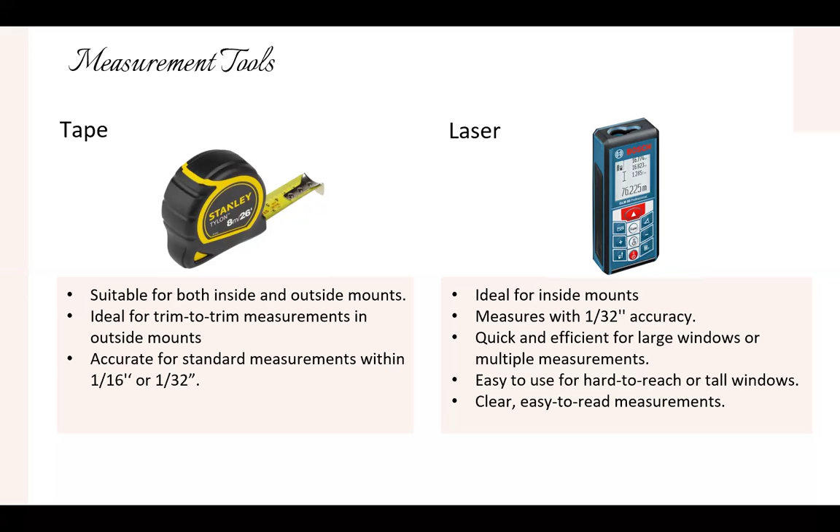For inside mount measurement, whether for open roll or enclosed shades, it's essential to take three width measurements at the top, middle, and bottom, as well as three height measurements on the left, center, and right. The most critical width measurement is the top because this is where the bracket will fit. Windows can be slightly off, with differences of up to half an inch between the top and bottom.

By using the top measurement for bracket to bracket width, you ensure a proper fit for the shade despite any minor inconsistencies in the window frame. For height measurements, use the longest measurement among the left, center, and right measurements. This ensures the shade covers the full height of the window, accounting for any variations in the window frame.

When measuring for outside mounts, the process involves taking three measurements for width, the top, the middle, and the bottom, and three for the height, left, center, and right, similar to inside mounts. However, it's crucial to remember that the measurements you provide and enter on the portal are always bracket to bracket. This ensures that our shades fit perfectly, accounting for the light gap on each side of the fabric. Our shades have specific light gaps, so the width measurement at the top is the most important for aligning the bracket with the window trim.

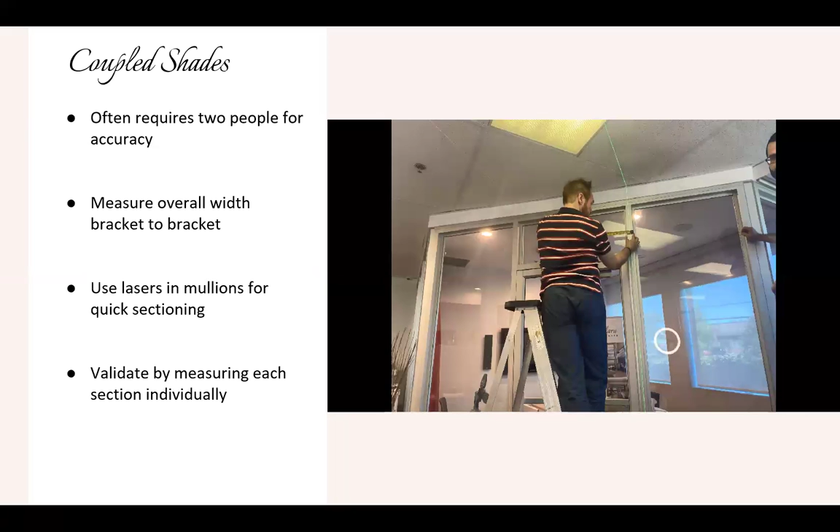For quick and easy installation, we place lasers in the center of each mullion. On the right side, you can see we have a green laser, and on the left side, a red laser. This setup allows us to measure from bracket to laser, laser to laser, and laser to bracket. The video shows the measurement from bracket to bracket first.

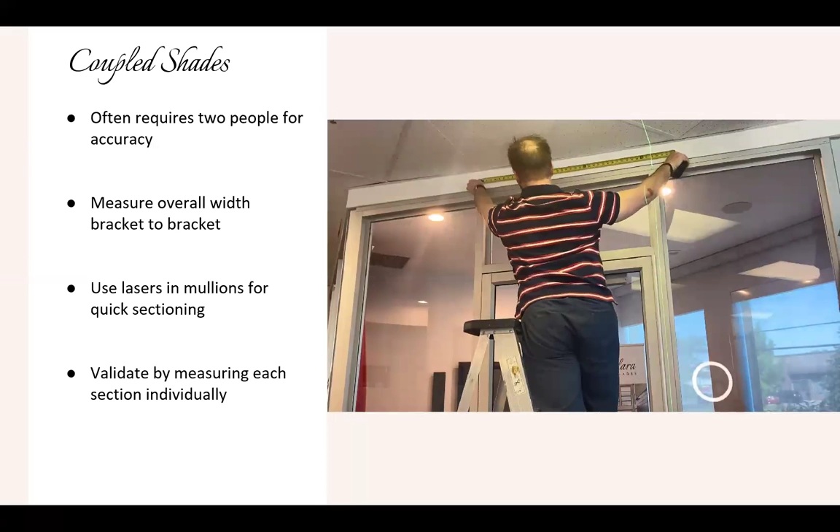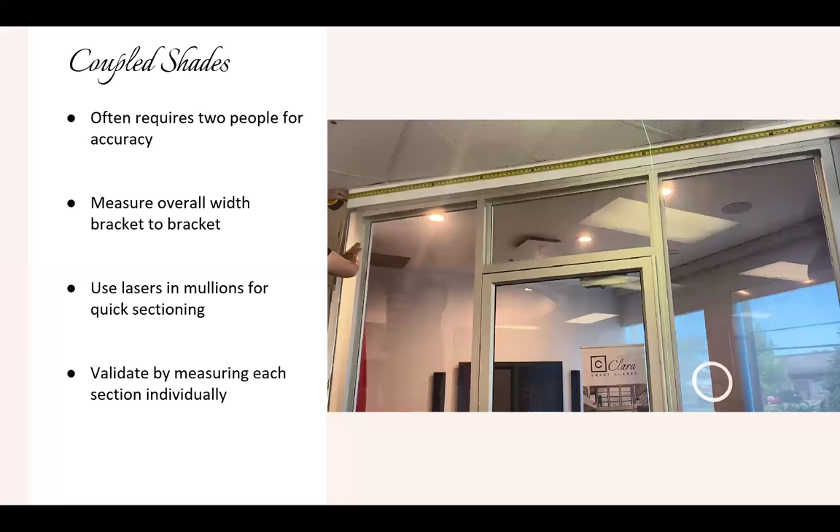Next, it demonstrates measuring the right section from the laser to the right bracket, followed by measuring the center section from laser to laser. While we didn't measure the left section in this example due to deductive reasoning, it's always best to measure each section to ensure accuracy.

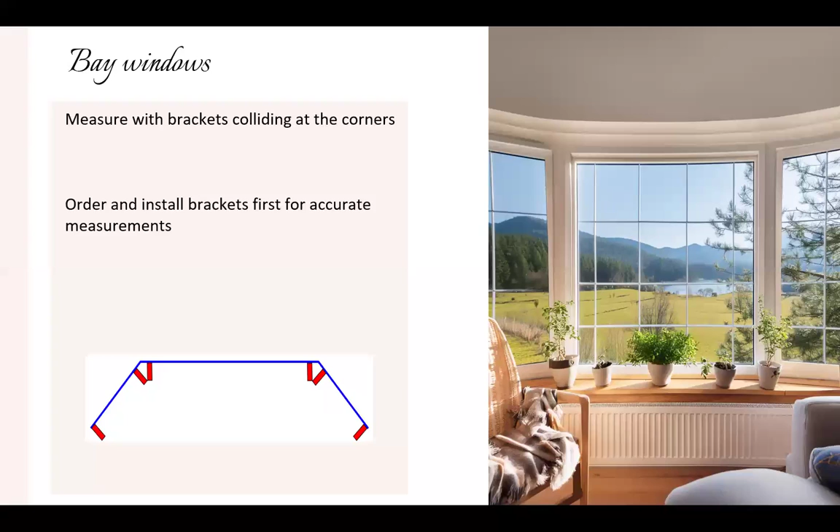While it's possible to calculate these measurements mathematically, it requires precision and experience to avoid errors. Therefore, ordering brackets first is a recommended approach for bay windows. All right. Next, let's explore the different installation procedures.

In the next video, we demonstrate the process of installing an enclosed inside mount regular roll shade. We begin by securing the brackets to the window frame. For this example, the window frame has a depth of over 4 1/8 inches, accommodating our Type 4 bracket, which measures 4 inches by 4 inches, plus the 1/8 of an inch fascia thickness. Since there is no protrusion from the frame, no end caps are required. It's a direct bracket to bracket installation.

Once the brackets are in place, we ensure the shade is leveled using the Allen key provided with each set of brackets. By making minor adjustments, we can align the shade properly to prevent it from telescoping or moving side to side during operation. After confirming the shade is level, the final step is to attach the fascia. It's essential to measure the window frame depth to determine if the brackets will fit without protrusion, ensuring a clean, flush installation.

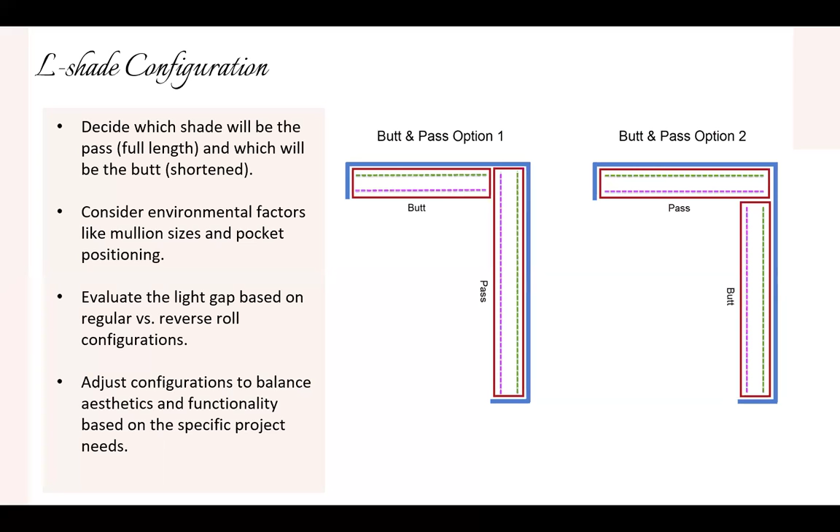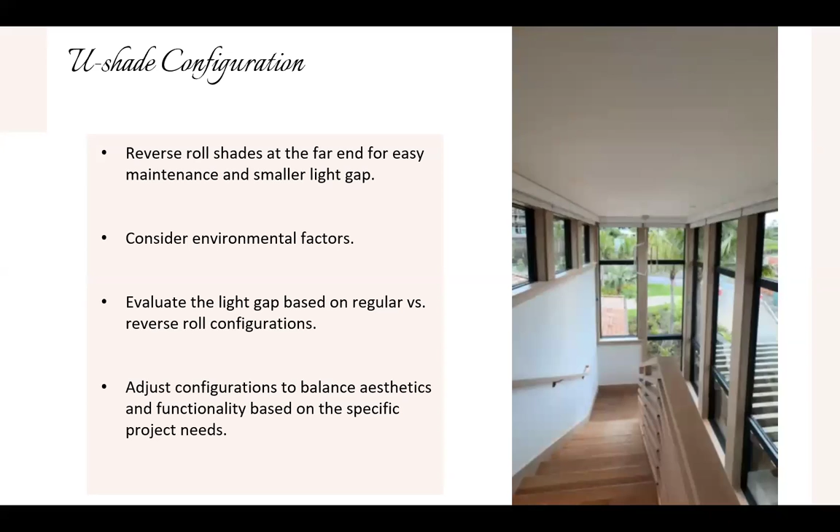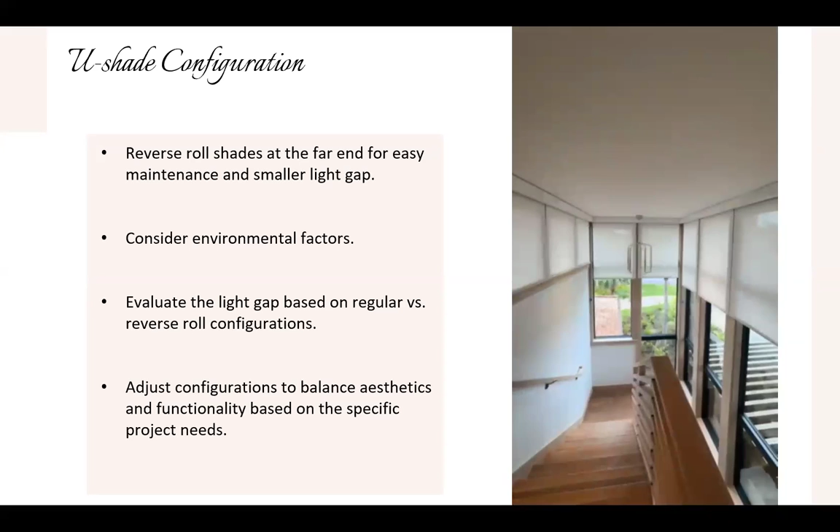To avoid this, the design uses regular roll shades on the sides and reverse roll shades at the bottom. This approach reduces the light gap and makes the bottom shades closer to the side shades. Additionally, it allows for easy maintenance from below without disassembling the surrounding shades. This setup optimizes both aesthetics and long-term maintenance efficiency, presenting an ideal solution for complex installations.

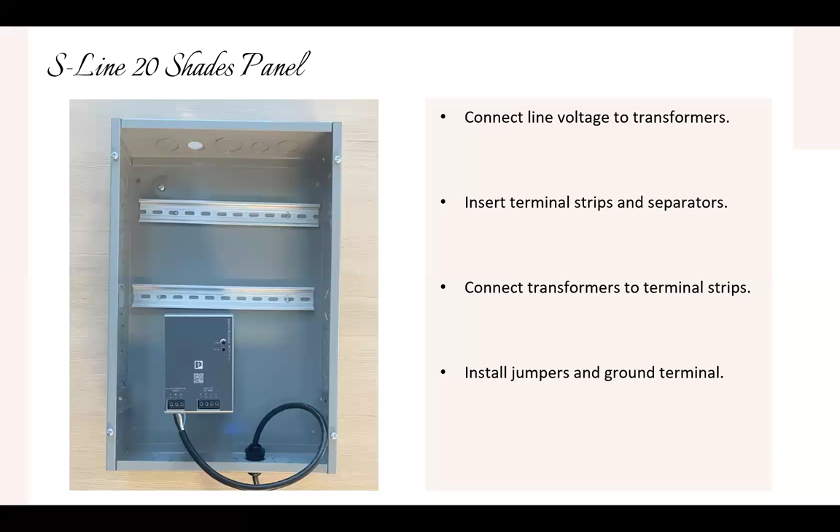All right, so now it's time to delve into panel wiring. In this section, we'll examine 2 stop-motion videos showcasing the assembly of panels. So first up, in this stop motion video, you'll see the assembly of an S-line 20 shade panel. We'll start with the main power supply units. Make sure a certified professional connects the line voltage into the bottom of the transformer. The upper ports on the transformer will then be prepared to connect to the low voltage terminal strips. The two power supplies are mounted at the bottom of the panel on the left and the right.

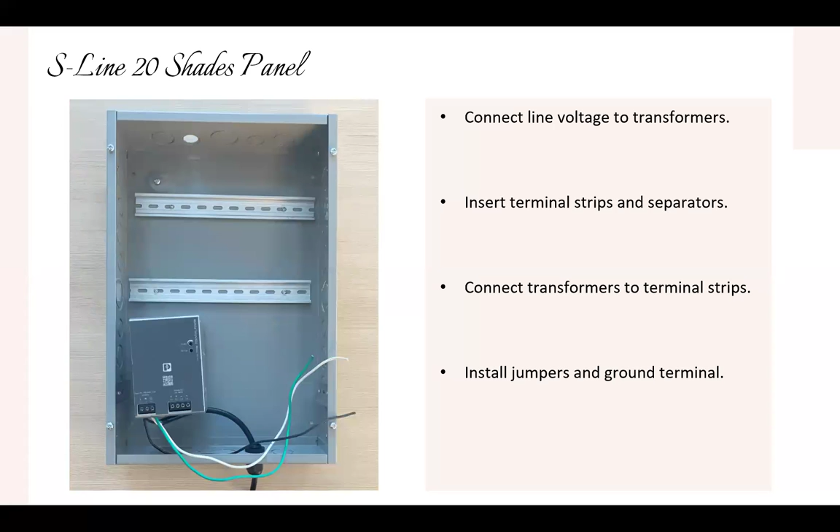Next, we insert the extreme right-hand side stopper, followed by the first power connecting block, which requires an end door for sealing. We then proceed to insert each subsequent power terminal strip. After the first 10, we add a second separator and continue with the next terminal strips. Once fully inserted, we connect the power from each transformer to the lower part of its terminal strips. The video shows that the doors are open for inserting the jumpers. The upper jumpers are in blue and the lower jumpers are in red.

Once all the jumper strips are installed, close all the fuse doors. The upper rows on the terminal strips are designated for the incoming shade wires, while the lower rows are for the power from the transformer. Additionally, you'll see the ground terminal in green being attached at the far right-hand side of the panel.

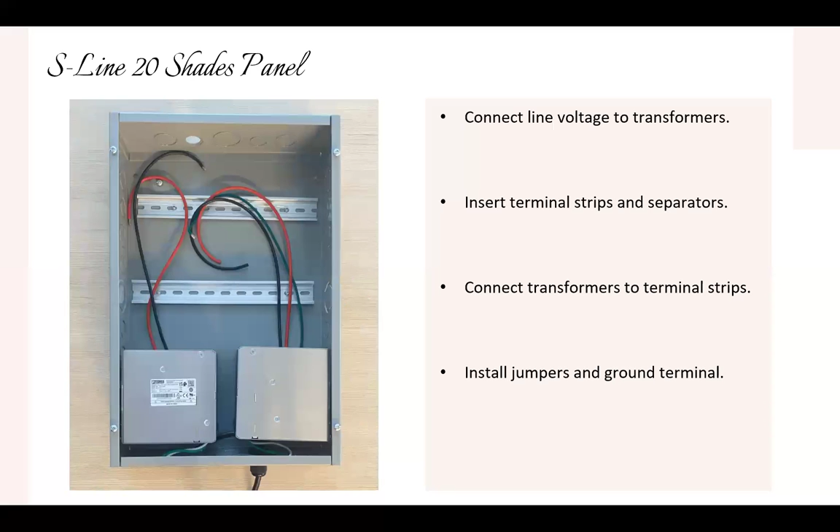Now it's time to demonstrate the assembly of a 20 shade Q-line panel with the additional communication wiring. Similar to the previous slide, we begin by setting up the power supply units and the terminal strips. A certified professional will connect the line voltage to the bottom of the transformers. You can now prepare the upper ports to connect the low voltage to the low voltage terminal strips. The power supplies are again mounted at the bottom on the left and the right of the panel.

Now, since it's a Q-line solution that is fully wired, we will also install the Q-line gateway and the data terminal strips in the upper portion of the panel. The first component to be installed is the Q-line gateway. Make sure to connect the low and high data communication ports, number 21 and 22, and the power wires for the gateway.

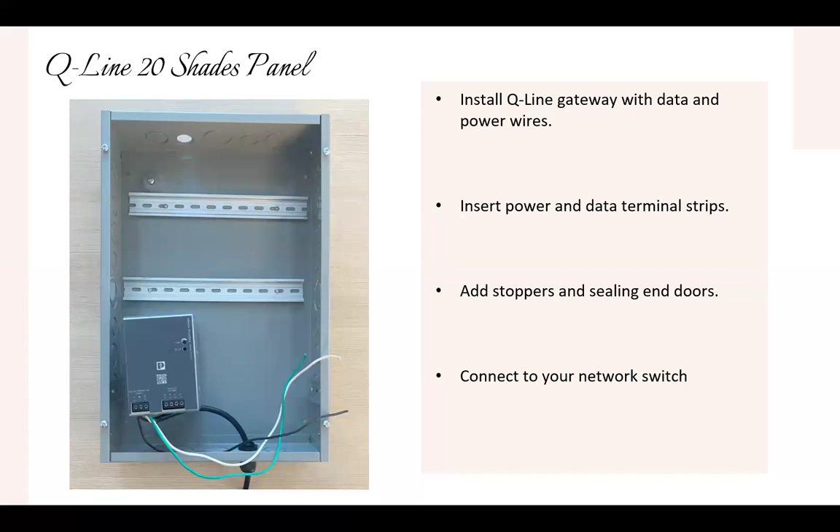Once the gateway is securely installed and the power wires are in place, we proceed with the installation of the communication strips. Start by inserting the left-hand side stopper, followed by the data connecting blocks, and adding a sealing end door to the open-ended block. After setting up the first 10 data terminal strips and adding the second stopper, we continue with the next 10 strips. Once the communication setup is complete, we connect the data communication lines from the gateway to the lower section of the first 10 data blocks, and then add a jumper from the 10th strip to the 11th.

The incoming wires from the shades are then connected to the upper part of the terminal blocks. It's important to insert the blue and red jumpers to ensure data flows across all terminal blocks. Finally, we connect the Ethernet cable to the gateway, thus enabling communication between the shades and the gateway over the terminal strips, and allowing the gateway to interface with your third-party control system via Ethernet.

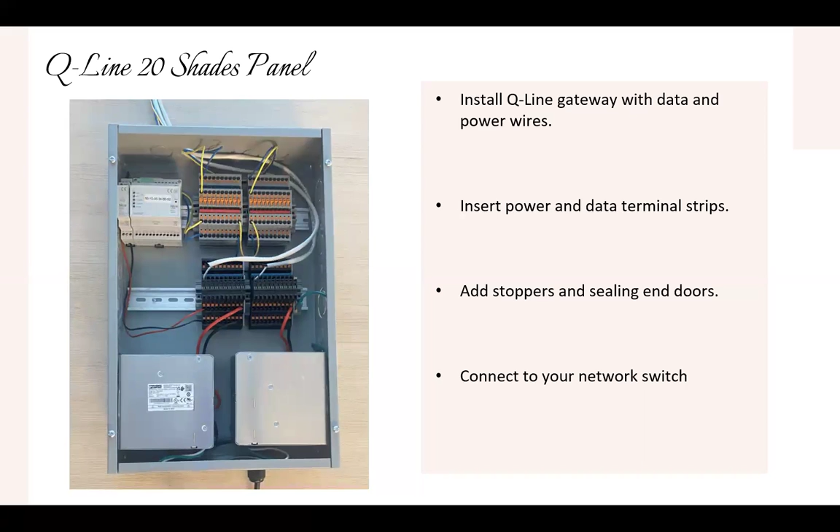I'll just let this video finish because there's quite a lot going on, and just so you get a second run through on it. There's the communication getting connected to the communication blocks, the jumpers getting installed, the terminal strips getting installed, and now we're connecting the shades from outside, and she's good to go.

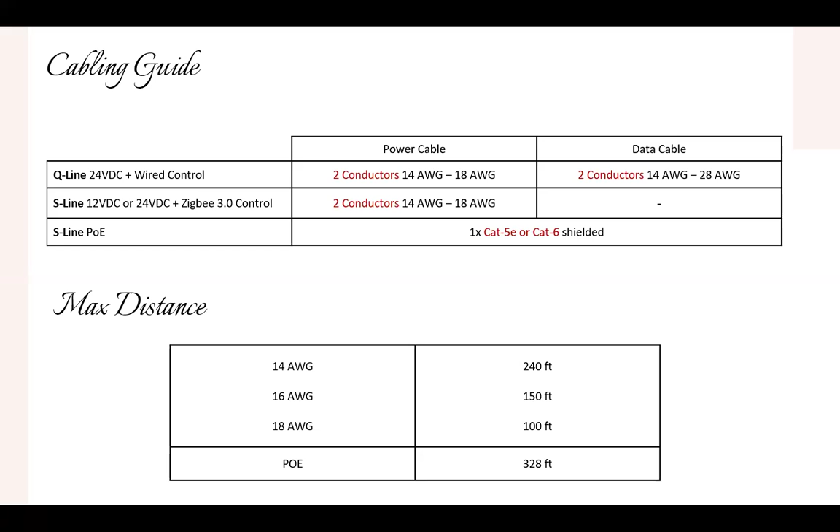When designing shades, it's crucial to allocate a dedicated 15 to 20 amp circuit for every 20 to 25 shades. This guideline applies to all of our indoor shades, including S-line Zigbee, Q-line, and PoE shades. For PoE shades, remember that 100 watts of PoE budget equals approximately 1.05 amps of consumption. This is essential for determining the right network switch for your needs. So it's good to stay up to date on network switches, as their specifications frequently change.

When choosing switches, consider the maximum power budget and the number of PoE Plus and PoE Plus Plus ports. For your first project, conservatively estimate 30 watts per PoE Plus shade. We have an upcoming PoE Plus Plus motor arriving soon, which will require different power considerations. A great option is an Araknis switch, such as the 300, 600, and 900 series provided by Snap. They are compatible with our PoE shades. And if you're using the 900 series, remember, it may require an additional power supply for the unit to reach its full potential.

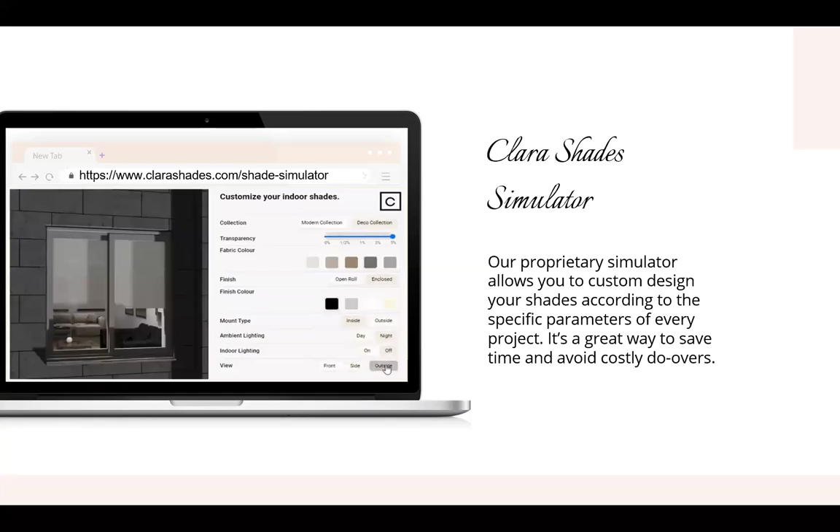Moreover, you can seamlessly embed the simulator into your own website using a simple HTML code available on the dealer portal. This feature ensures that your customers stay on your website rather than being redirected to ours. With our commitment to excellence and innovation, you can truly see the difference in every aspect of our product offering and our streamlined approach to the dealer channel.

We ensure that every project begins smoothly with our tailored pre-sales engineering consultations. After placing an order, our rapid lead times of 2 to 3 weeks for indoor shades and 4 to 6 weeks for outdoor shades enable you to meet your deadlines with ease. On site, you can easily access our 3-tiered support team via phone, email, or by scheduling a Genius Squad session, ensuring you and your team receive timely and effective assistance whenever needed.

You can access affordable sample books and demo stands either through the portal or at any Snap store. Additionally, you have access to marketing collateral and an embedded shade simulator, which can be integrated directly into your own website. We offer a 30% discount on demo orders, which includes 5 indoor and 1 outdoor shade. As well, we have a 10% discount on your first order to get started on the right foot.